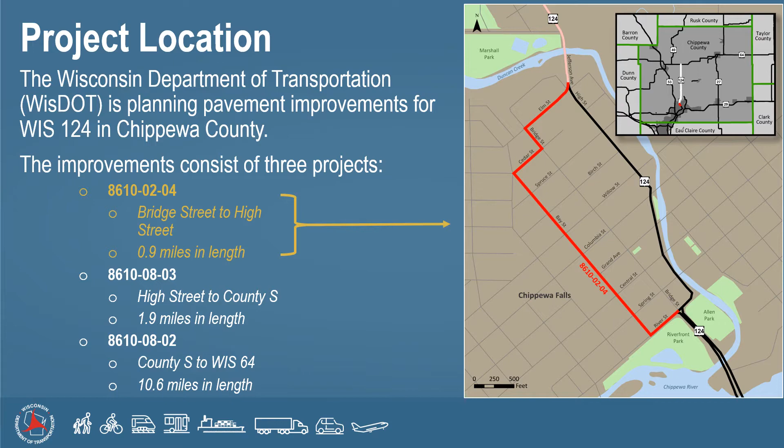The 124 improvements will consist of 3 projects. This slide shows the limits for project ID 8610-02-04. Of the 3, this project is the furthest south. The limits extend from Bridge Street to High Street as shown on the map to the right.

The next is project ID 8610-08-03. Its limits extend from High Street to County S as shown on the map to the right. The northern piece is project ID 8610-08-02. It extends from County S to Wisconsin 64.

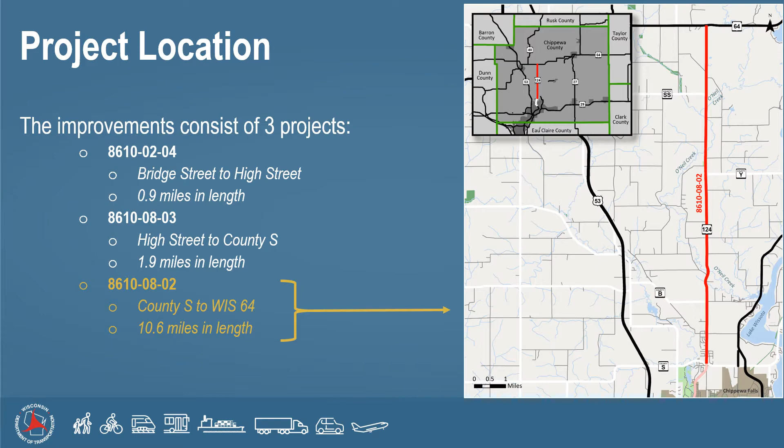Now, Zach Larson, our project designer, will go through some more project details with you.

Wisconsin 124 is the main north-south route through the city of Chippewa Falls and the towns of Eagle Point, Woodmohr, and Bloomer in Chippewa County. This principal arterial has an annual average daily traffic count of 6,400 near Chippewa Falls, and the corridor has approximately 32% trucks, as this is a designated Wisconsin long truck route.

Wisconsin 124 is a 2-lane road from Wisconsin 64 south into Chippewa Falls. In the city, Wisconsin 124 is split with 2 lanes running north on High Street and 2 lanes running south on Bay Street. This project will only impact the southbound lanes.

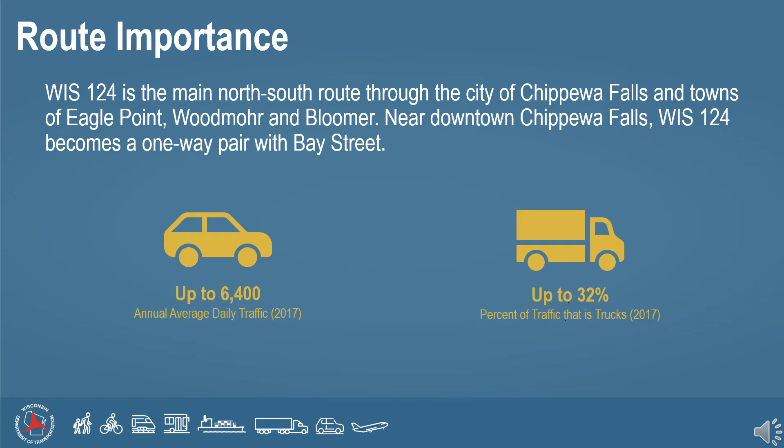The purpose of the proposed project is to preserve the roadway, improve the deteriorating pavement, and extend the roadway's service life. The primary need of the project is deteriorating pavement. Longitudinal and transverse cracking has become visible in the existing asphaltic pavement.

The Pavement Condition Index, or PCI, is calculated based on the results of a detailed pavement distress survey that identifies pavement distress type, distress severity, and distress quantity. 0 is the worst possible condition, and 100 is the best. PCI ratings range from 50 to 71 as shown on the next slide.

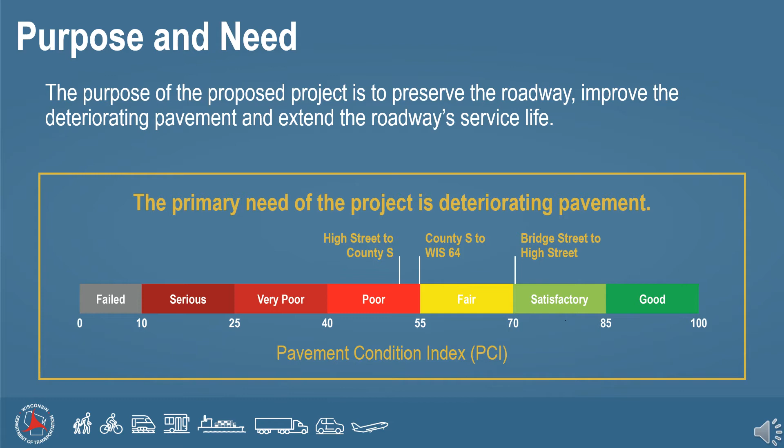The pavement in the middle segment of the project is in the poorest condition, followed by the segment from County Highway S to Wisconsin 64. The condition of the stretch from High Street to Bridge Street is satisfactory.

The project also has secondary needs such as substandard curb ramps, aging culverts, substandard guardrail, and deteriorating bridge features.

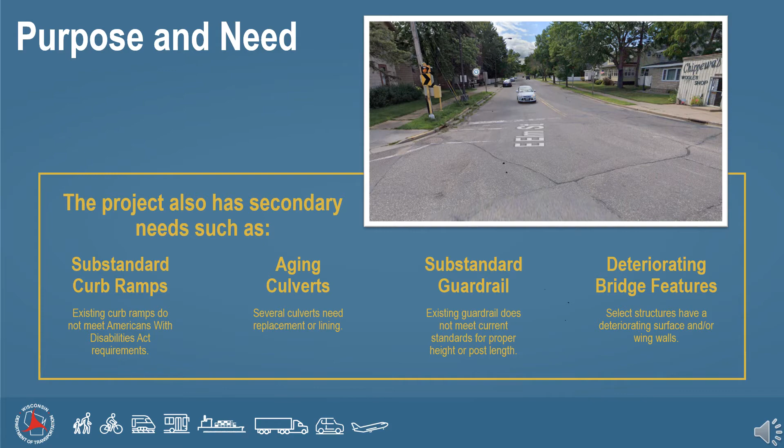2 alternatives were considered. The first would do nothing beyond normal maintenance such as crack filling. The second would be to mill and overlay Wisconsin 124 as well as address the secondary needs as discussed on the previous slide.

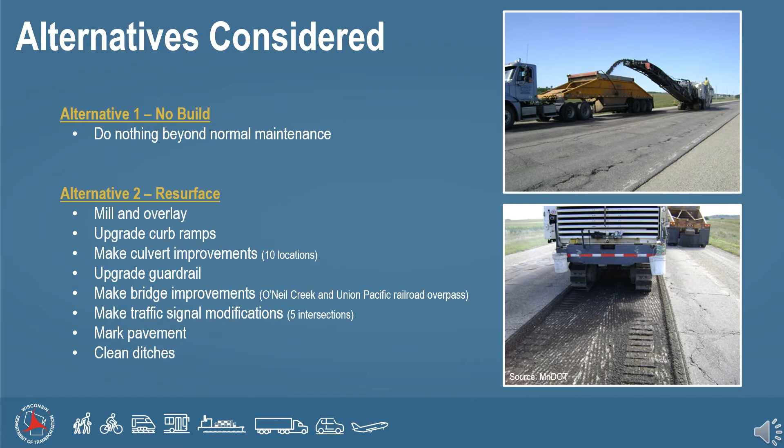This slide summarizes both alternatives. Alternative number 1 does not address the purpose and need as the existing pavement would continue to deteriorate. Even with normal maintenance, the roadway would eventually lose its utility as a travel route. Alternative 2 does address the purpose and need of improving the deteriorating pavement and is the recommended alternative by WisDOT. Secondary needs would also be addressed with alternative number 2.

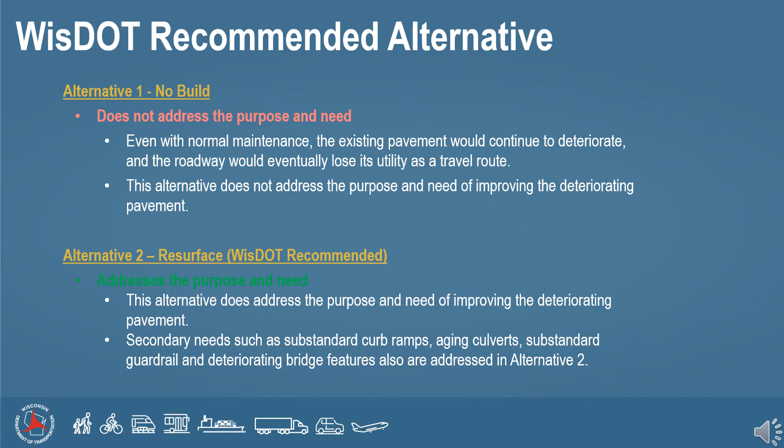Upgrading traffic signals on southbound Wisconsin 124, or Bay Street, at the following 5 intersections: Columbia Street, Grand Avenue, Central Street, Spring Street, as well as River Street. Upgrading curb ramps to current Americans with Disabilities Act standards.

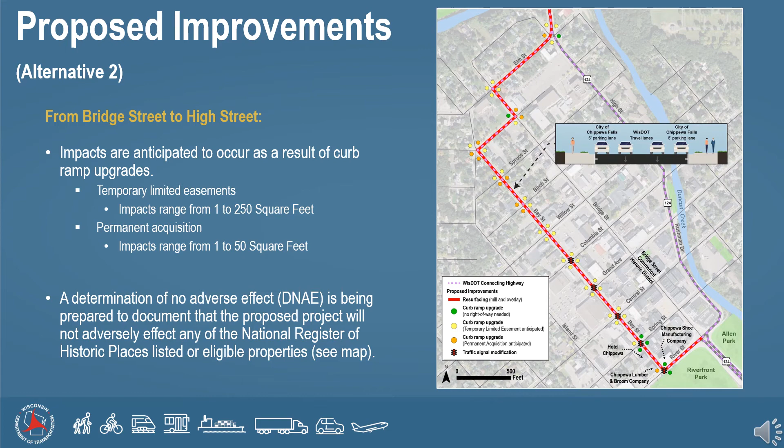A determination of no adverse effect is being prepared to document that historic properties will not be adversely affected by the project. Historic properties within the projects are shown in black text on the map. There is a historic district on Bridge Street between Columbia and Spring Streets, but those properties are outside of the project limits.

This slide gets into the proposed improvements of the build alternative for project ID 8610-08-03. Similar to the last slide, this portion will also be milled and overlaid, and improvements to 3 culverts will be made near the north end of the project.

Temporary and permanent acquisition will again be required for curb ramps as noted by the green, yellow, and orange dots. There will be a temporary impact to Irvine Park while removing and reconstructing an upgraded curb ramp.

This slide shows the proposed improvements of the build alternative for project ID 8610-08-02. This portion will be milled and overlaid with thicker asphalt, raising the profile of the road 1 to 2 inches. As a result, driveways will be feathered in to match the higher profile.

Culverts marked in blue will be improved or replaced. In addition, guardrail will be upgraded. Ditches are currently being analyzed between County Highway S and 95th Avenue to determine if ditch cleaning will allow better ditch flow. The bridge over Union Pacific Railroad tracks will receive a concrete overlay, and the northwest wing wall will be replaced on the structure over O'Neill Creek.